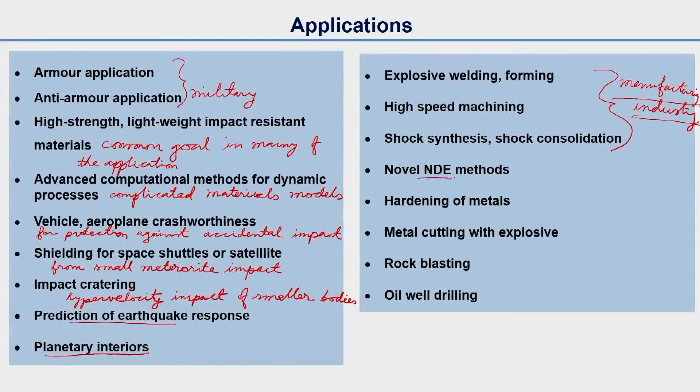Prediction of earthquake response also involves the study of dynamic wave propagation. And planetary interiors, that is the dynamic processes inside a planet, Earth or other planets, require this knowledge. We'll talk about manufacturing industry processes a little later. New non-destructive evaluation methods have to be developed to study dynamic behavior of materials. Then hardening of metals - some metals or alloys can be hardened with explosive loading. And then metal cutting with explosives, rock blasting, and oil well drilling.

So let us discuss the military applications, armor and anti-armor. Armor applications involve bulletproof vests or armor vehicles. Bulletproof vest we can call body armor.

Armor vehicles can be lightweight combat vehicles or heavy tanks, or even general vehicles for VIPs, very important persons, or top government officials. So these applications need high strength impact resistant material.

And about anti-armor applications, a very common one is the shaped charge, which can have velocity up to 10 kilometers per second. We'll discuss this in a while. And then kinetic energy penetrator, then explosively forged projectile, which is also the same as shaped charge, and then plastic explosive head. So let us discuss the shaped charge, which is one of the most common anti-armor applications.

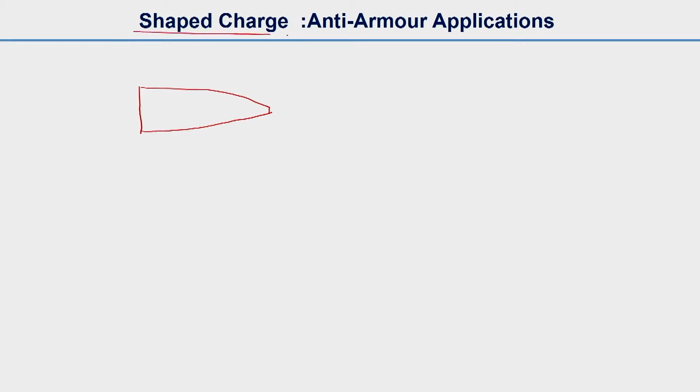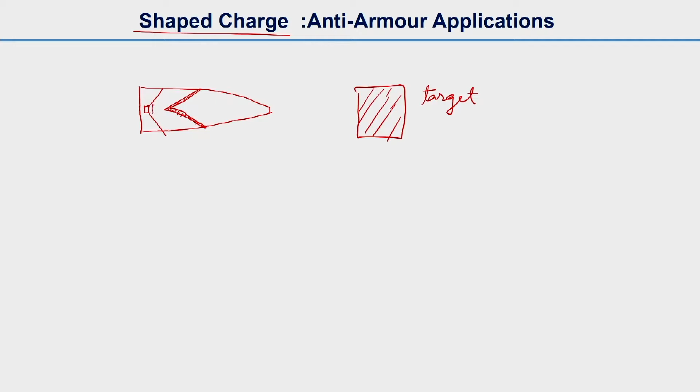Basically, this is the missile we have with the shaped charge. So we have a target here, and we have a metal cone, which is the main part of this shaped charge. We should have a detonator here, and then we have high explosive. This is the detonator, and we have high explosive. This is the metal cone, detonator, metal cone, and we have a sensor here.

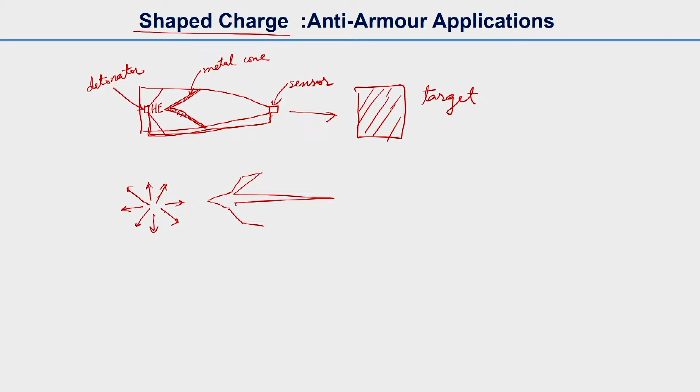This sensor will be connected to the detonator. So when this missile hits the target, the sensor will send signals to the detonator, and the detonator will explode - that means it will explode the explosives in there, and then this metal cone will take a shape something like this. It will transform to a long rod, and then it will ultimately hit the target. It will hit the target, and finally this is the explosion, the detonation.

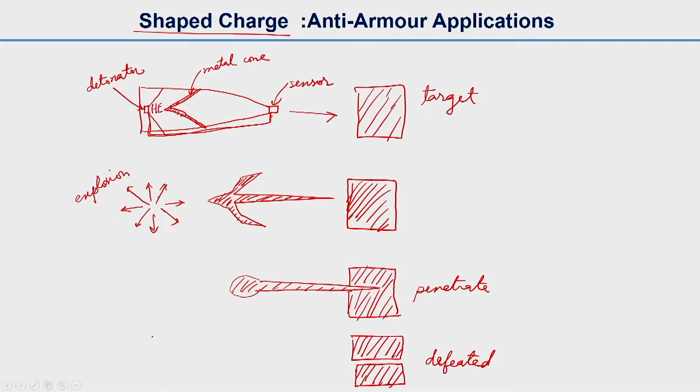And finally this will take a shape like this, and it will penetrate the target, and then finally the target will be defeated - the target will be defeated by the shaped charge. So this is how the shaped charge works.

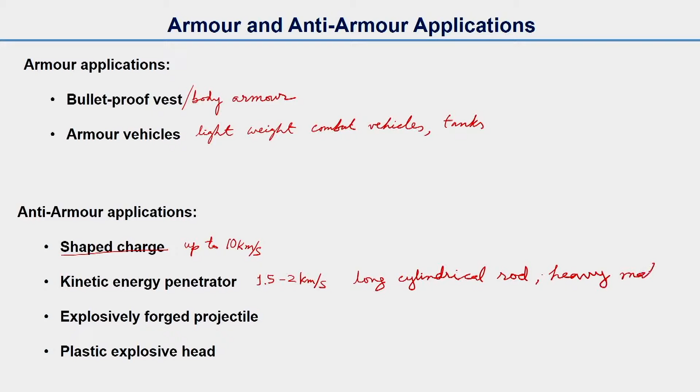And then coming to the kinetic energy penetrator, which has a velocity of about 1.5 to 2 kilometers per second. It's a long cylindrical rod made of heavy metals, made of heavy material, especially commonly used as tungsten or uranium.

Then there's the explosively forged projectile, which is the same as a shaped charge we already discussed, but the main difference is a disc is used instead of a cone, in place of the metal cone we use a metal disc. So that's the main difference.

And the plastic explosive head is another one. The plastic explosive head deforms upon impact, and then it detonates, and this detonation produces a shock wave. The shock wave reflects at the inner surface of the armor, and that leads to fragmentation without any perforation, through a phenomenon called spalling, which we'll discuss later.

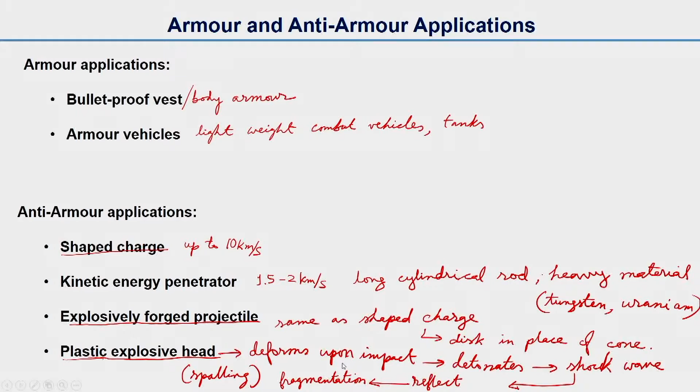So let us discuss manufacturing industry applications and high speed fabrications. We will discuss explosive welding and then explosive forming. So explosive welding is basically a solid state welding process.

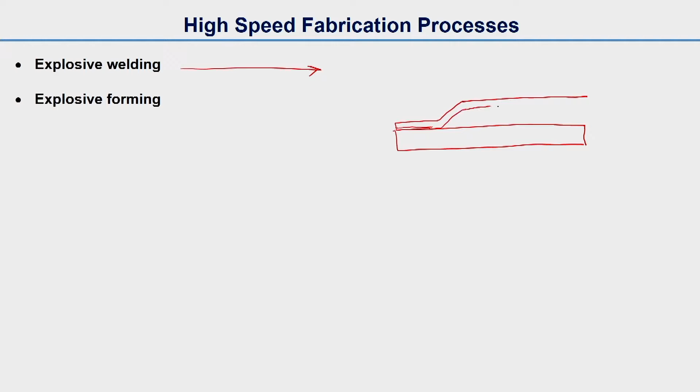A base plate, let's say some carbon steel, can be joined with a cladding, let's say a thinner plate. This is the cladding thinner plate, and this is the base plate. Let's say this is made of carbon steel, and the other one is some corrosion resistant material, stainless steel or some other material. So we want to join these together.

So what we do is we have an explosive layer on top of this material, and then it explodes here. This is detonation. The explosives here, basically the plates are joined together due to this explosion, and eventually it will also join. So basically this process can be used for metals with

very different melting points. This type of joining is not possible through conventional welding processes. Also, one advantage is that very large plates, meaning large areas, can be joined together within a very short time. So that is one advantage. However, we need a great deal of knowledge about the explosive, how it explodes, for this welding process.

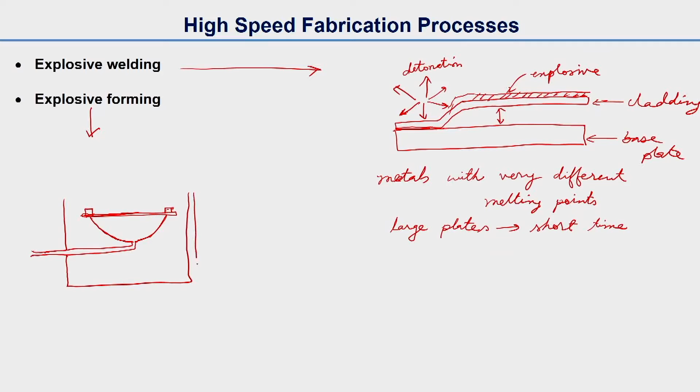That is one requirement. Now let's talk about explosive forming. So basically we have the workpiece here with a die. Let's say with this process you can make a bowl. This is the bowl, side view, and you have this workpiece. This is your workpiece, it's a sheet, and you have some clamp for this workpiece, and the entire setup is inside, let's say, below the earth's surface.

So this is okay, we'll give some more room here. This is basically for vacuum, to produce vacuum here. So to produce vacuum, this is the die, this is your workpiece. So we will have an explosive in here. This is the explosive, and generally the explosive is not in direct contact with the workpiece, so we will have water in this.

Water is the transferring medium for the shock waves. So a shock wave will be generated, water is the shock transfer medium. So basically when the explosive explodes, this workpiece will take the shape of the die. This is how even some big bowls are manufactured. So this will take this shape. Now the flat workpiece will take a shape like this.

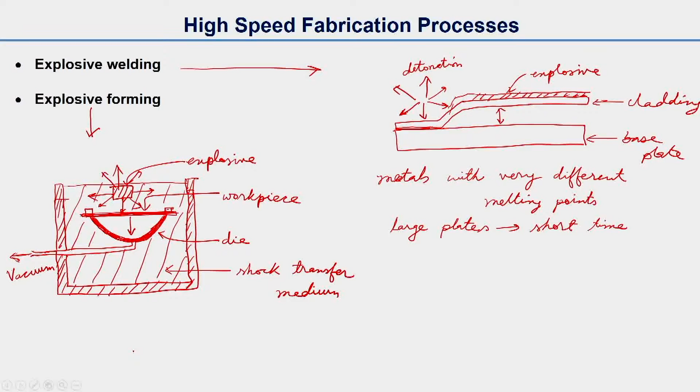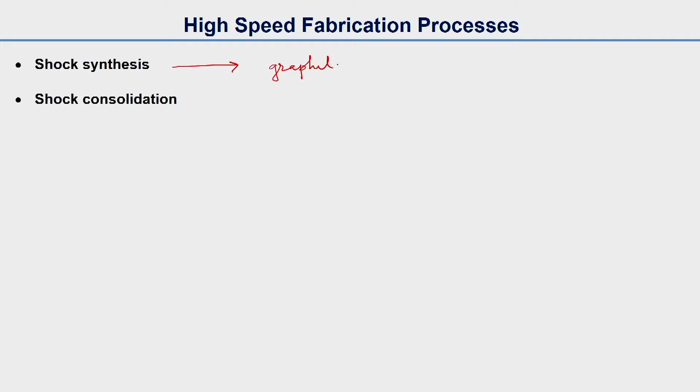So this is explosive forming, and then we will talk about two more processes: shock synthesis and shock consolidation. Shock synthesis is used for production of diamond from graphite, so we can have diamond from graphite. And for shock consolidation, generally used for powders, it can be metal powders, polymers, or ceramic powders.

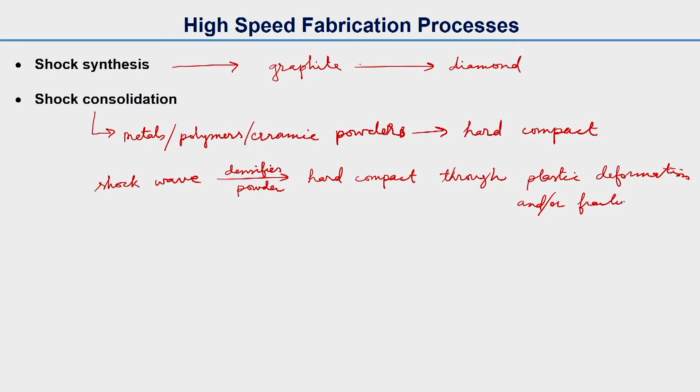To make any hard compact out of these powders, basically the shock wave densifies the powder to make some hard compact, and hard compact is made through plastic deformation and/or fracture. Basically it happens like this: suppose for example, if you were taking some powders in this cylindrical tube container.

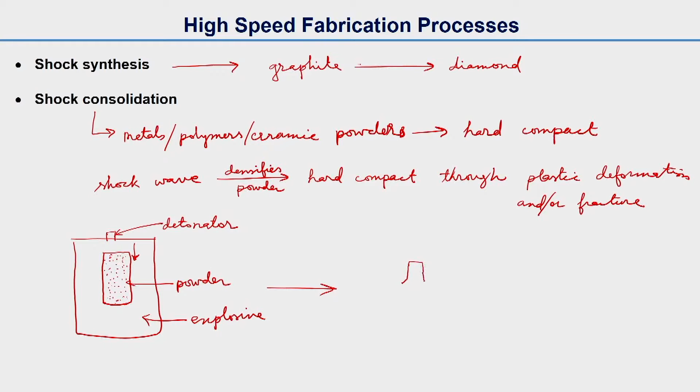So we have powder here, and then you have a concentric cylinder with explosive. So you have the powder here, and this is the explosive. So you can detonate from here, the detonator. So when it detonates from the top side, the powder will transform to some solid from this side.

This way, the commonly consolidated material is boron nitride and diamond, for cutting tool applications.

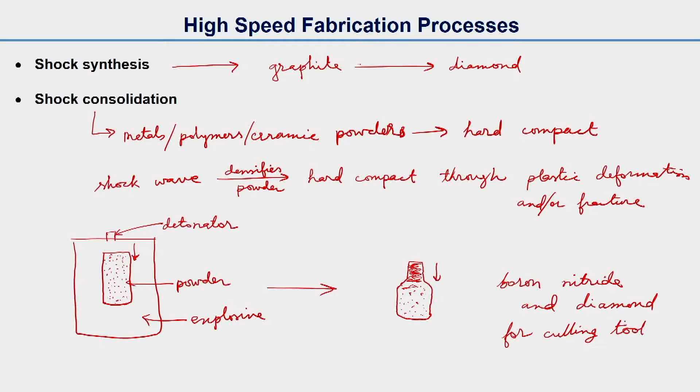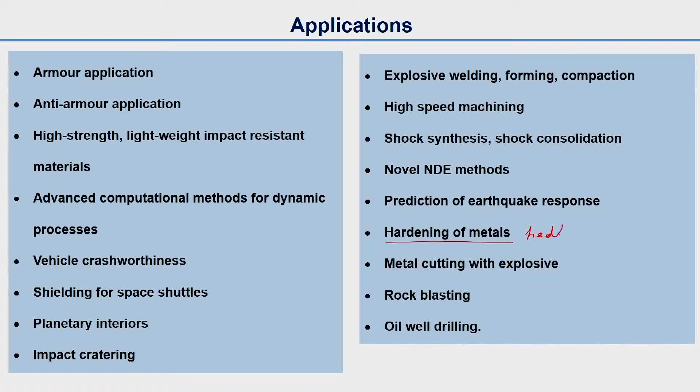Okay, so similarly we can have other applications. Basically hardening of metals is also an important industry application. Shock waves are used for Hadfield steel, which is a manganese based steel. Also another application is rail hardening of rail frogs, which is the rail joints, and this can be done with this process.

And metal cutting with explosives, this is nothing but the shaped charge. This is the shaped charge. And then rock blasting uses tension and compression waves to fragment the rock.

This oil well drilling also uses shaped charges, which is loaded down the hole, and that makes the perforation for oil recovery. This is perforation for oil recovery.

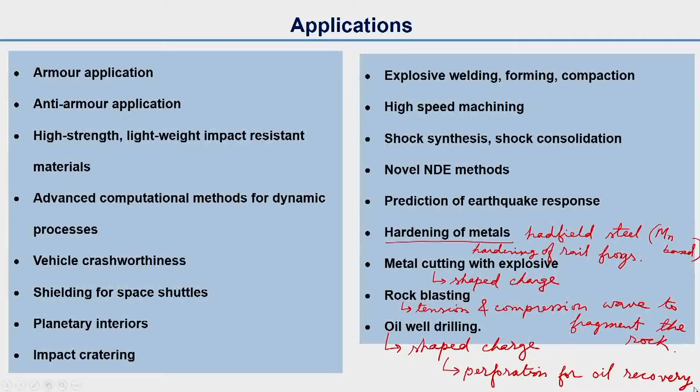So let us discuss now about the structure of the course. What we discussed is the applications, and that is basically to get the motivation for why we need to study this course, dynamic behavior of materials. Now let us discuss about the structure of the course.

In the introduction part, we talked about dynamic deformation mechanism and quasi-static deformation mechanisms, how they are different, and what is the difference in the failure mechanisms, and what is material strain rate sensitivity.

Now then we will talk about the stress waves - elastic waves, plastic waves, and shock waves. After that we can discuss about experimental techniques for dynamic deformation. There are intermediate strain rate tests, and slightly higher strain rate tests, which use the split Hopkinson pressure bar, the most commonly used standard test, and then expanding ring test, gun systems, and a few more we will discuss later.

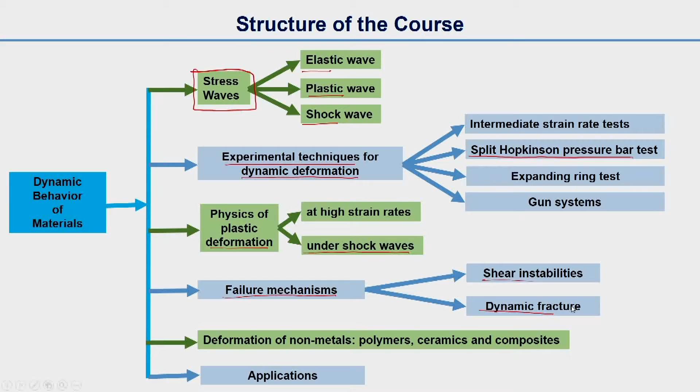And then the physics of plastic deformation at high strain rate and under shock waves, which is different than the normal high strain rate processes. And then failure mechanism - already we have discussed in the previous lecture about the shear band and dynamic fracture. So we'll discuss about the applications and deformation of non-metals, polymers, ceramics and composites as well.

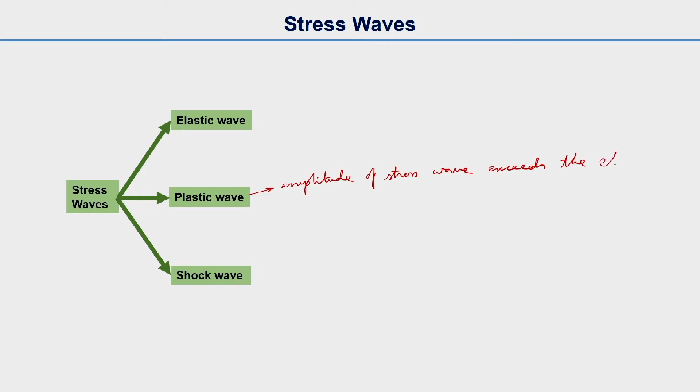So for the stress waves, the elastic waves are associated with the elastic deformation. Then when the amplitude of the stress wave exceeds the elastic limit for a ductile material, plastic waves are generated. Plastic waves have a lower velocity than the elastic wave, so the velocity of plastic waves is lower than the velocity of elastic wave.

And again for shock waves, when material is bound, that is no lateral flow of material is allowed, the plastic deformation front is different. So this will lead to a very different plastic deformation front, which will be very narrow, thickness very low - it can be even smaller than a micrometer. And also the shock wave will lead to phase transformations in the material, and even some chemical changes, chemical reactions in the material.

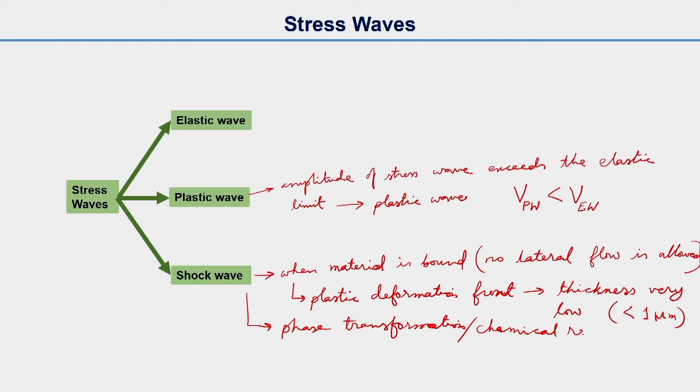So we discussed about the stress waves, and then after that we will talk about the experimental techniques of dynamic deformation. So let us see the different strain rate ranges for different tests or experimental techniques for dynamic deformation. As we discussed in the previous lecture, the unit of strain rate is second to the power minus 1. We already talked about how we can calculate the strain rate.

So in this case, if the strain rate is very slow, for creep and stress relaxation tests it can be 10 to the power minus 9 to 10 to the power minus 5, and then comes the quasi-static test, which is 10 to the power minus 5 to almost 1, or very close to that. And then for dynamic, we have dynamic low, dynamic high, and even very high speed, high velocity impacts. So basically for the first two categories, the inertia forces are not important.

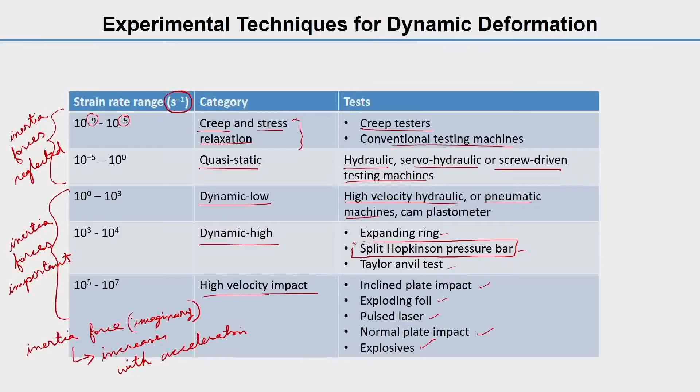So we will discuss about that. Let us discuss a little bit in detail about the split Hopkinson pressure bar test. It is also called the Kolsky bar. Hopkinson is the person who developed this test, but then Kolsky modified it a bit.

Basically, the setup of this test is very long. Its length can be a few meters long, and we have a gas gun with compressed gas.

The compressed gas will be used to drive our projectile, or what we can call the striker bar.

We have this striker bar assembly. We have a striker inside it. This is what we call a striker.

This is our striker, or striker bar, or we can call it the projectile bar.

So we have some rail supports, on top of which we have all these arrangements. We can have these types of supports.

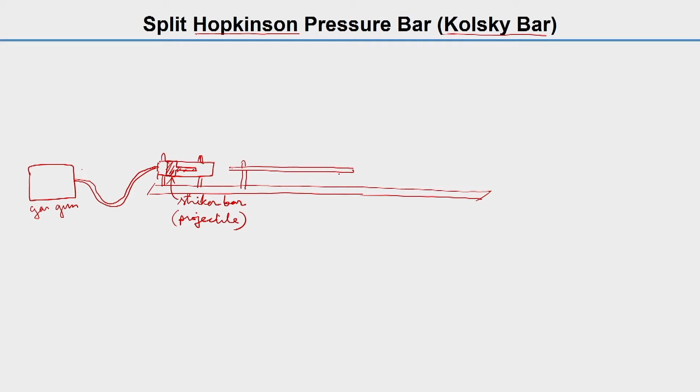Then we have the sample here, a very small sample, and then again we have another long bar, which is called the transmitted bar.

So this is your striker bar, this is your incident bar. The projectile will hit the incident bar. This is your specimen, which is very small.

Mostly it is smaller than the bar diameter. The common bar diameter can be 1 centimeter or even 2 centimeters, so the sample size is very small, in the millimeter range.

This is the transmitted bar, and we will have some shock absorber arrangement here.

Shock absorber arrangement. So we will have some strain gauges here.

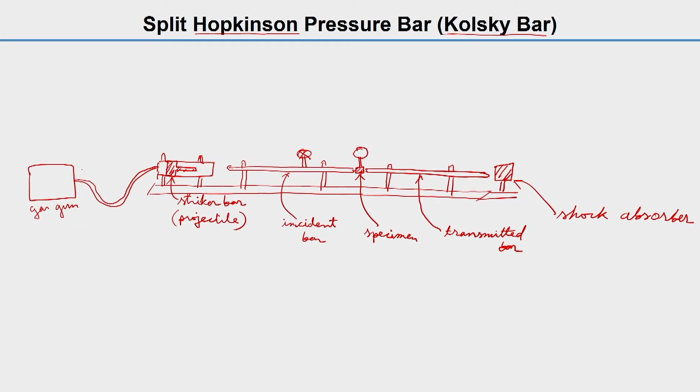Firstly, one strain gauge on the incident bar, another strain gauge system near the specimen, and then another set of strain gauges.

These are strain gauges. There can be multiple strain gauges, by the way, in one bar.

Basically, the striker bar will hit the incident bar, and then the specimen is mounted here in between the incident bar and the transmitted bar.

Basically, the stress wave will propagate through the incident bar and then to the specimen, and it will transmit to the transmitted bar.

Details about these tests we will discuss later. With the help of this test, we can obtain...

Basically this is like the dynamic version of the very common test we perform with our universal testing machine.

And this is what I showed you - it is a compression test, but tension as well as torsion is also possible with the split Hopkinson pressure bar.

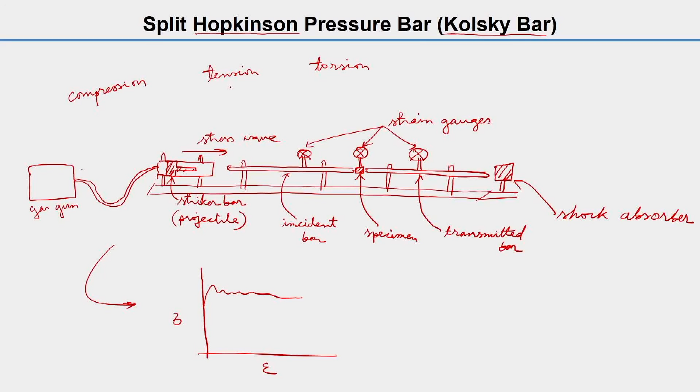Tension and torsion have a little bit more complicated setups. The same setup can be modified to have tension and torsion tests.

After that we will talk about the physics of plastic deformation. We already know that plastic deformation mostly involves dislocation motion, and other forms of plastic deformation mechanism may be twinning.

So basically we need to review our basic understanding of dislocations and dislocation movement, how slip happens, how twinning happens.

So dislocation, slip and twinning. And then at high strain rate we will discuss about material strain rate sensitivity, which we already introduced in the previous lecture.

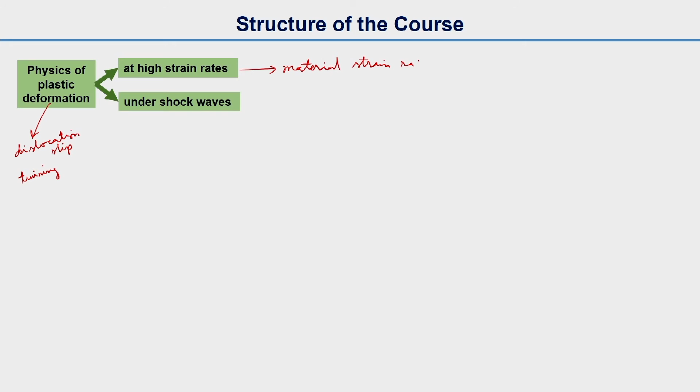And then under shock waves, we will discuss about mechanisms of defect generation. Mostly we'll talk about point defects...

...line defects, and then interfacial defects, and even phase transformations.

So point defects, as you know, interstitials and vacancies.

Line defects - dislocations, and interfacial defects involving twins and stacking faults.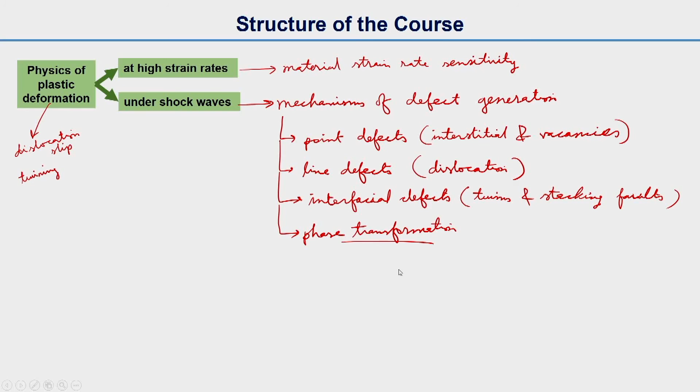And then we will talk about phase transformation. So these are basically the deformation mechanisms under shock waves.

After that we will talk about failure mechanisms that we already discussed in the previous lecture, such as shear bands.

And dynamic fracture - we have seen that the crack can branch in dynamic fracture, and crack propagation velocity has a limiting value, which we already discussed and will discuss in more detail later in this course.

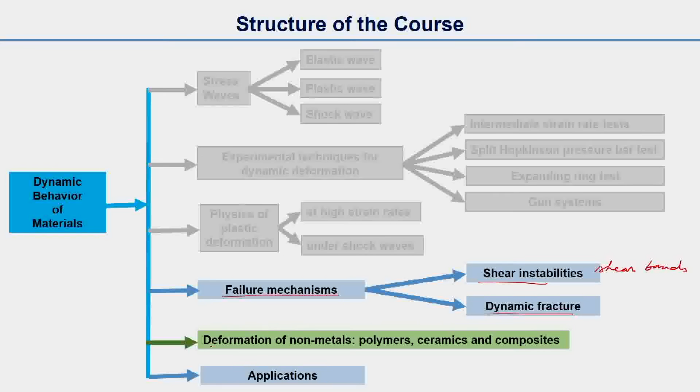And then deformation of non-metals is different from metals, as everyone probably knows. Then polymers, ceramics and composites - we will discuss a little bit of that.

And then we will discuss details of applications. We will probably have one or two classes on details of applications. We already discussed some part of it.